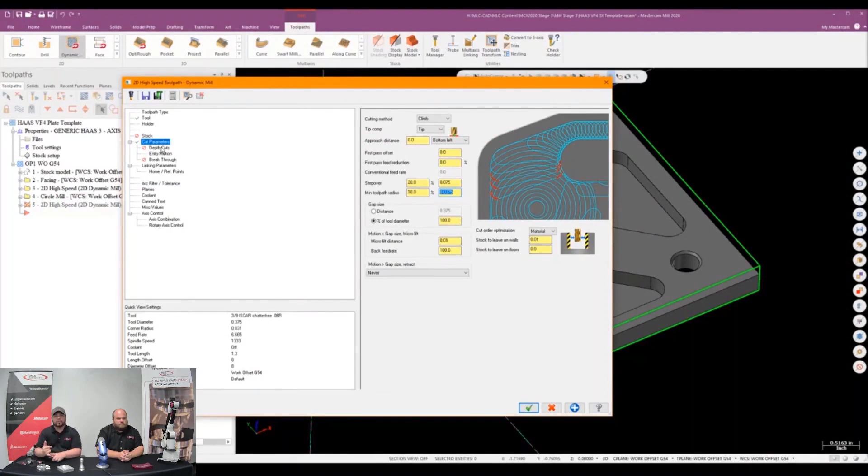Moving forward, some of you may be pretty familiar with some of these packages and add-ons that we have available for Mastercam. Depending on your experience, we're going to go ahead and start with the Mill-2D side. When I talk about the Mill-2D side, I typically think of your basic toolpaths, such as your contour toolpaths, drilling toolpaths, and any kind of tapping or reaming cycles you may encounter within Mastercam. But we also have the ability to do other operations within the 2D package, such as what we see here in the video, where we're doing a pocket operation.

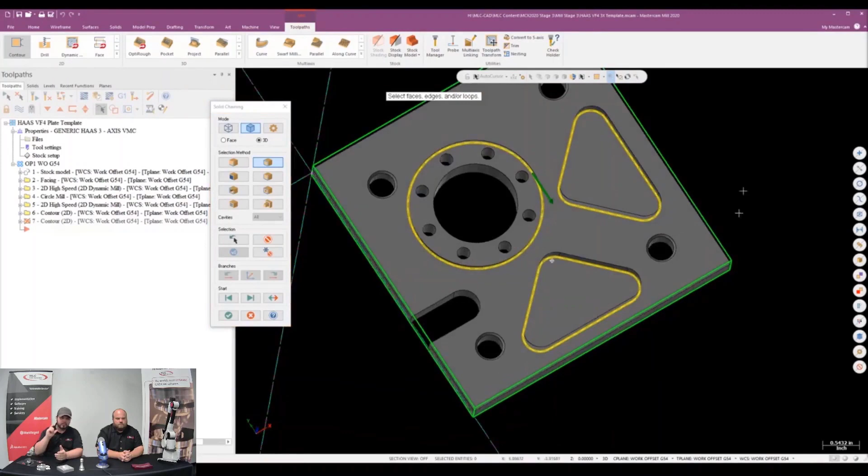As you can see from the actual toolpath itself, we're utilizing the dynamic motions that Mastercam has to offer. Within the 2D package, you'll also see your dynamic toolpath, and these type of toolpaths and motions within Mastercam will allow you to take advantage of the radial chip thinning that these toolpaths have to deliver. You'll also see more extended tool life, being that you're taking more of the blade of your end mills instead of just the tip.

We also have the opportunity to maximize the metal removal rate with these toolpaths and reduce your cycle times as well. With the radial chip thinning, you're going to see higher feed rates, whereas your typical contour toolpaths you may see standard slower feed rates like you would in the past.

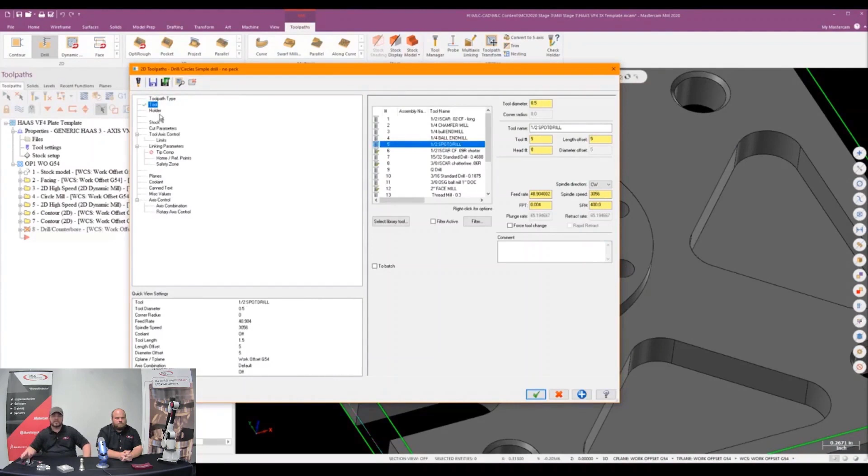As we see here, we also have our hole operations as well. We have the ability to sort our holes depending on how we select them. We can select our tools and different types of operations, and then we have a basic rundown of our linking parameters here within Mastercam, showing your clearances, your retracts, and of course your top of part and the depth that you want to drill. So a lot of these toolpaths that you'll see on the 2D side are going to be very familiar from one page to the next, even if you're going from drilling to milling.

So notice you certainly start at the top, work down the page, fill in the information, and you're going to get a good toolpath.

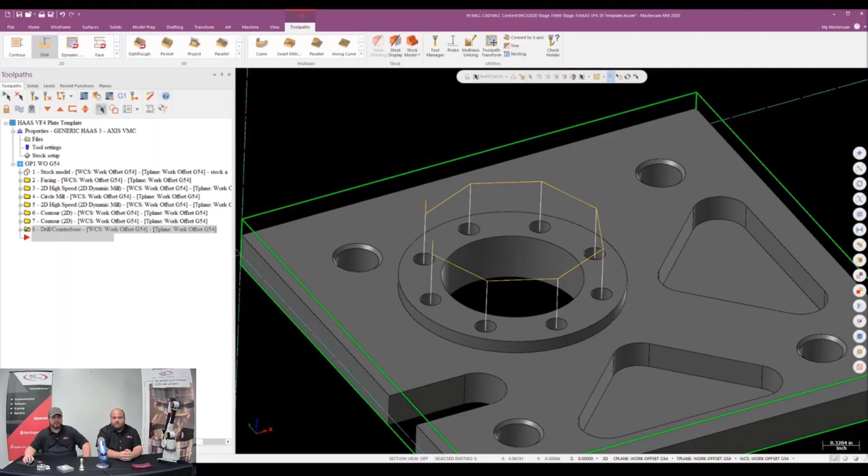Mill-2D certainly is very capable, but it comes up that some parts are just more complicated than others, obviously, and when you start getting into, say, multiple surfaces, multiple axes, and that sort of thing, or you just need a little bit more different performance, Mill-3D may be the answer. A seat of Mill-3D may be more productive and more cost-effective for you. So we'll do that next. Sherman's going to tell you a little bit more about Mill-3D and what makes it unique and advantageous.

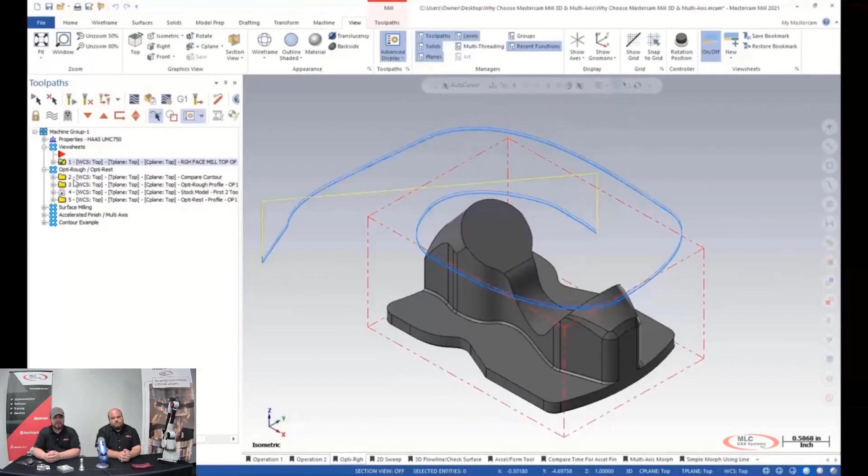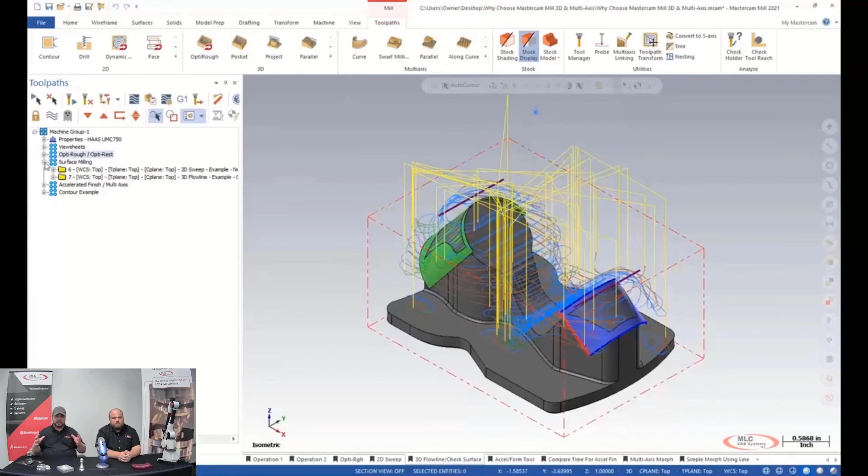Taking a look at the Mill-3D side, what you can see here is a basic contour toolpath that we have going around our part, chasing the profile of this part. The 3D side of Mastercam gives you the ability to utilize all three axes at one time. But the problem in this case is what we see with the difference between our contour and our OptiRough—I can actually take advantage of the full solid of my part.

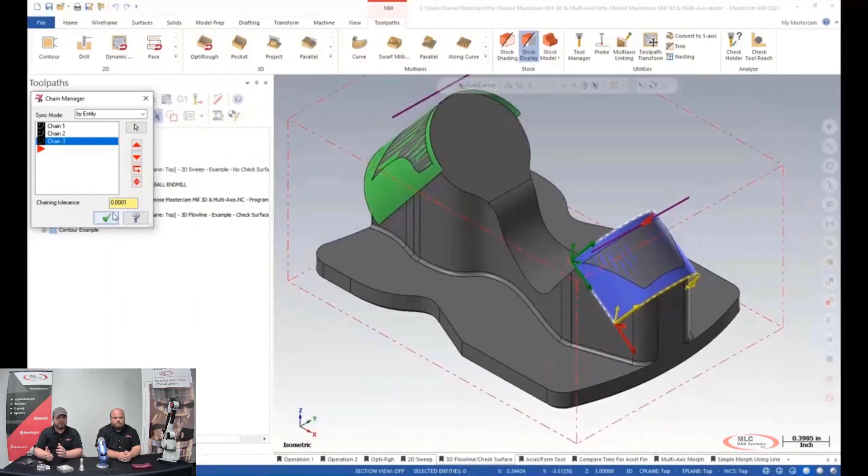Whenever we jump off into the Mill-3D side, we can utilize the solids and reduce the cycle time it takes to cut what we've seen here for the profile versus what we actually have here for the full 3D operation. The 3D mill side of Mastercam will allow you to read these complex surfaces, and again, you can still take advantage of the dynamic motions that Mastercam has to offer. In this case, we were using an OptiRough operation. Within these operations, you can also add different stock allowances to different surfaces as well.

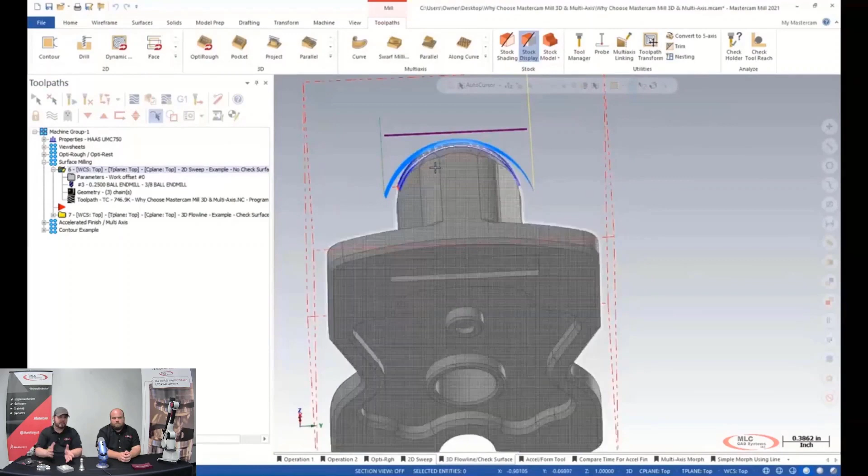So unlike the standard 2D package where you're kind of locked into what you want to leave for your stock and wall, with OptiRough, whenever you're roughing out, I can actually leave different stock on different surfaces on this part and have a little bit more control over what I want to leave for my finish operations.

So these toolpaths, you could say, it's not only easier to create the tool paths than create a finished part, but your program in the end is probably better too. Yeah, more efficient program, definitely.

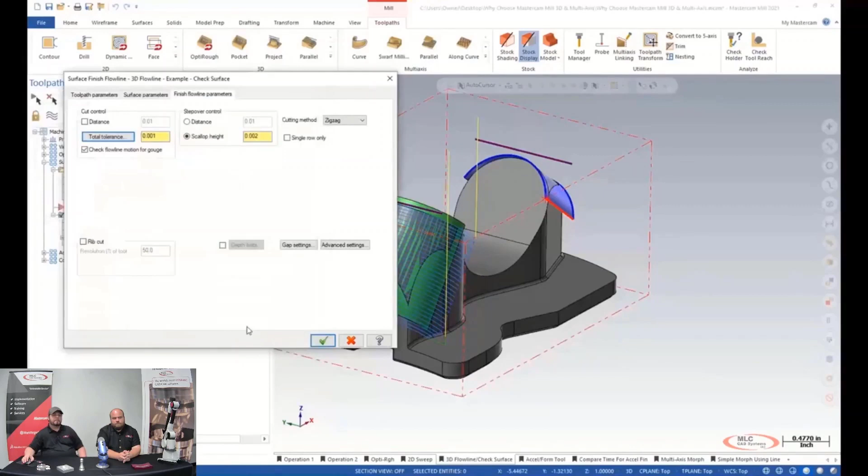More efficient programming. So in an instance like the part we're looking at here, if I wanted to rough out the center cavity, right down the center, I would have to actually create geometry to cut down. Where the profile is pretty straightforward, I can cut the profile completely around because I have just a straight wall. But now in the center, what we see on this cutout, for me to try to read that surface...

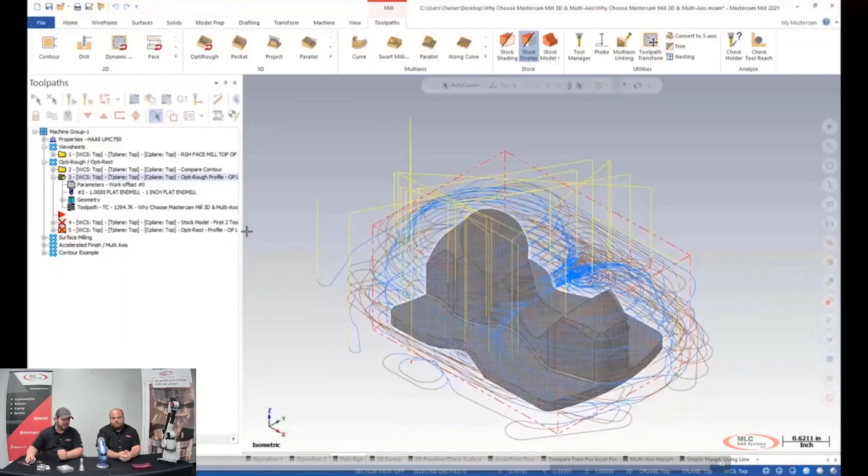OptiRough right off the bat is doing it all in one shot. It's taking advantage of the OD, the outside perimeter, and the inside as well. Where in 2D, I would actually have to have geometry laid out.

I mean, it gets a lot more complex, and those hours add up in programming. Yeah, so definitely add up.

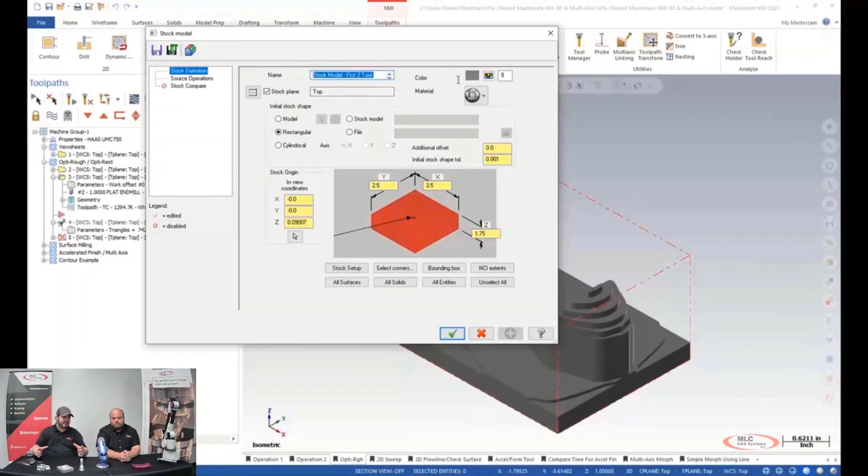And what you see here for the stock that's left behind under our stock model, within Mastercam, I can actually take larger depths and utilize that dynamic motion. And then after I'm done, actually step up and take shorter steps to get a better finish as well.

So instead of starting from the outside every single time and stepping down to get that small scallop height, we can actually take large steps and then work our way up and reduce that cycle time as well. Good deal.

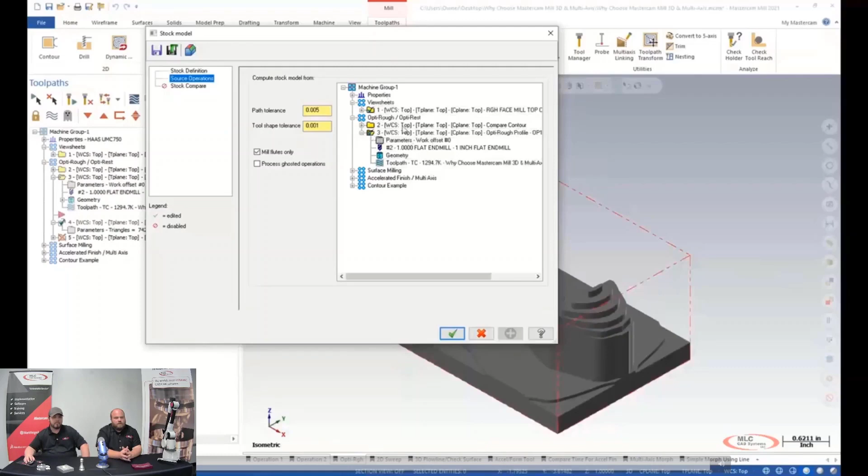But we could take advantage of the multiple surface side and read those complex surfaces, as said before. So, that looks good. And with that said, even with all that capability, sometimes there's still more, especially if you start talking about more complex shapes and the equipment too.

5-axis machines, I would say mostly. We offer a Multiaxis add-on, which would be features you add to Mill 3D. So why don't you tell us a little bit about Multiaxis and where we can take advantage of that package or that offering?

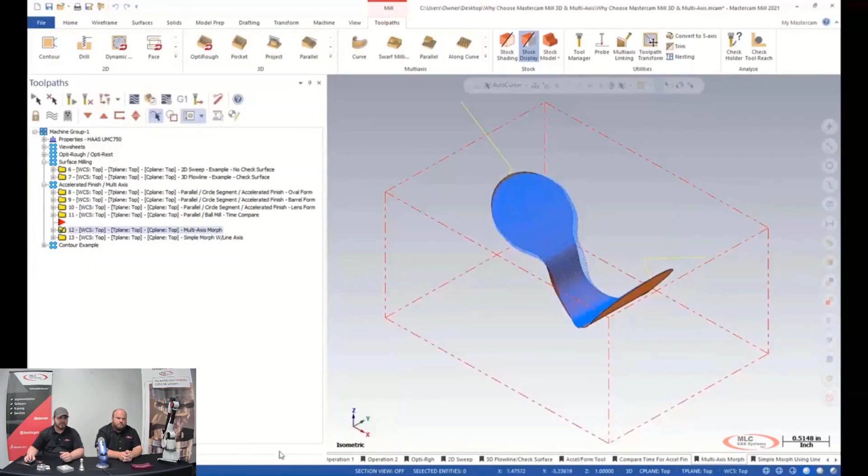Absolutely. So when it comes to the Multiaxis package, as we can see here, I have a nice surface mill toolpath. And what we're going to do for the Multiaxis, in this case, we could take advantage of the tilt axis that we're allowed inside of Mastercam.

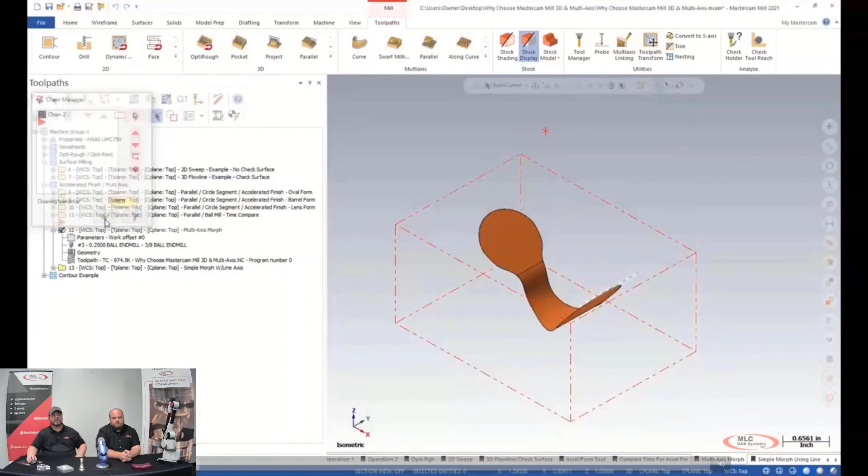When it comes to the Multiaxis side, we also have advanced gouge checking. So I can check my tool paths against certain features such as my holder or the shank of my tool. And when I run into any instances where my tool might be gouging into the material, I can tell Mastercam to either rethink the tool path or retract.

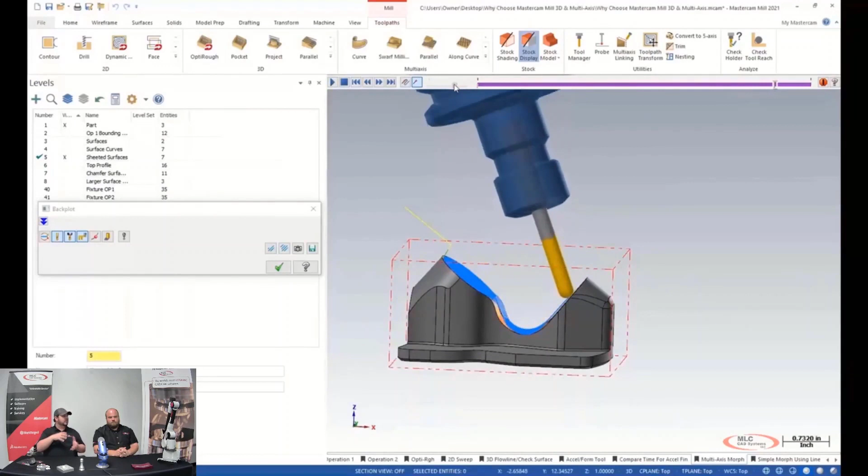So you definitely get a lot more features as far as collision checking capabilities just on the Multiaxis side. And when you say collision checking, we're talking about the cutter itself, the part, work holding? Yes, work holding as well. The machine itself? Yep. The table, the spindle?

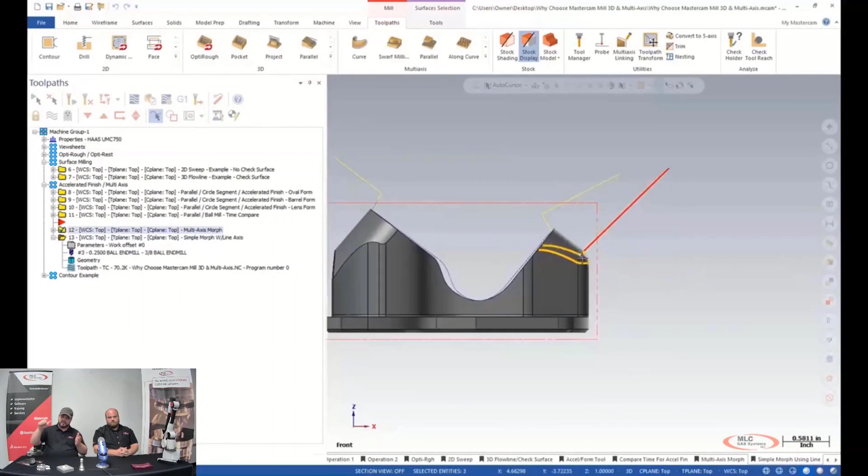Absolutely. So whenever I think about Multiaxis, I also think of machine simulation. One of the biggest things whenever you're working within Mastercam, in this case you see this part, I can actually verify or backplot my toolpath, and it's going to sweep from one side to the next just fine.

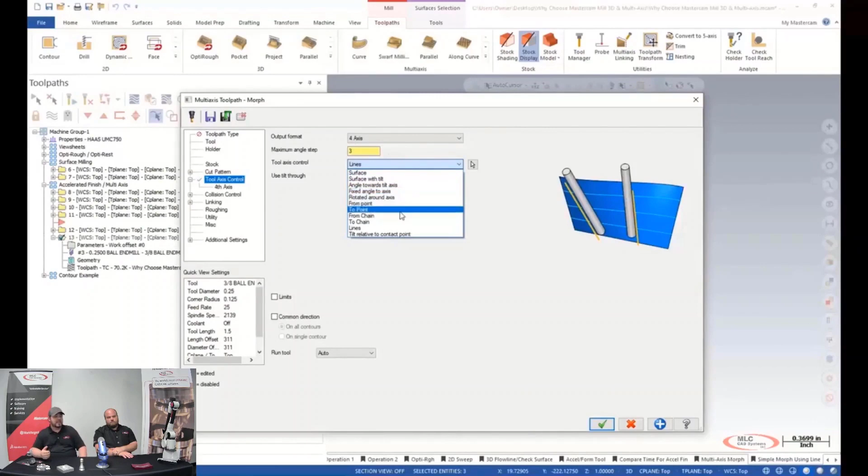What you don't see on the simulation side is when we actually get to the center of this, the table rotates. So not only are we taking advantage of those simple gouge checking capabilities, or the more advanced ones in this case, but when you compile this with the machine simulation, you get the full-blown environment, and you can actually see everything that's happening on the machine.

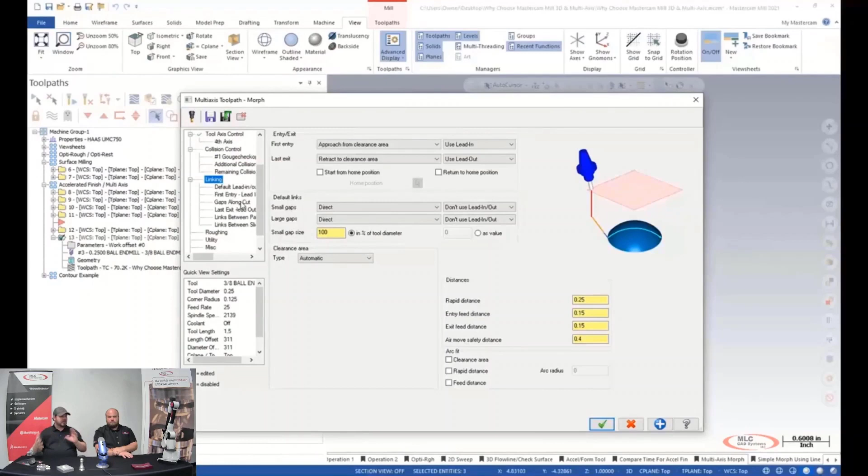But also with the multi-axis side, we start working with, say, 5-axis safety zones, where I can utilize my stock around my part, or I can create a cylinder about my part to make sure that my tool stays within the safety zone as this part's rotating around. At the end of the day, when it comes to your simple 3+2 operations, it's all about clearance, and you want to make sure that you're clearing your part.

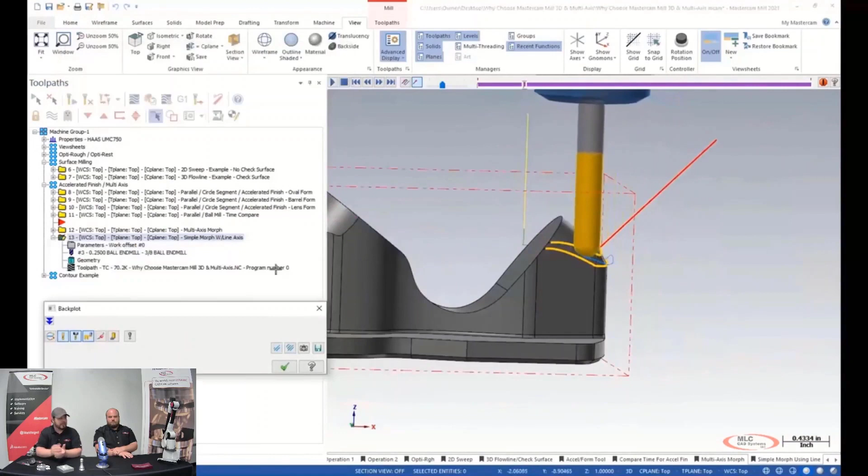When we start looking at the multi-axis side, in most cases, a lot of times people have the tendency to think, well, we're doing full 5-axis capabilities, and you do have those options. That's what this is all about.

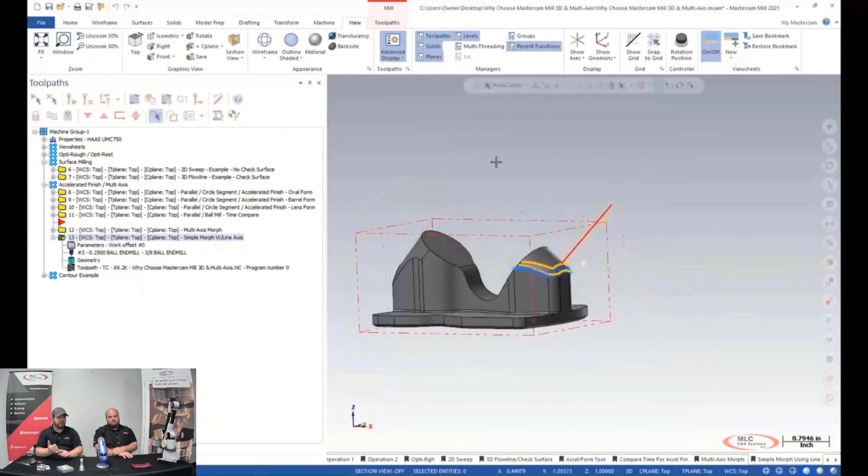But I also bring up the fact that we could take advantage of these more advanced options, advanced tool paths that we have, and make them a simple 3D or a simple 3-axis operation as well, or a 4-axis operation. So this is not machine specific. I don't need the highest end, highest tech machine. This software can help with just about any mill, really.

Correct. So if we have, say, a Haas vertical with an A-axis on the end, I can still use my morph capabilities that you'll see inside of the multi-axis operations.

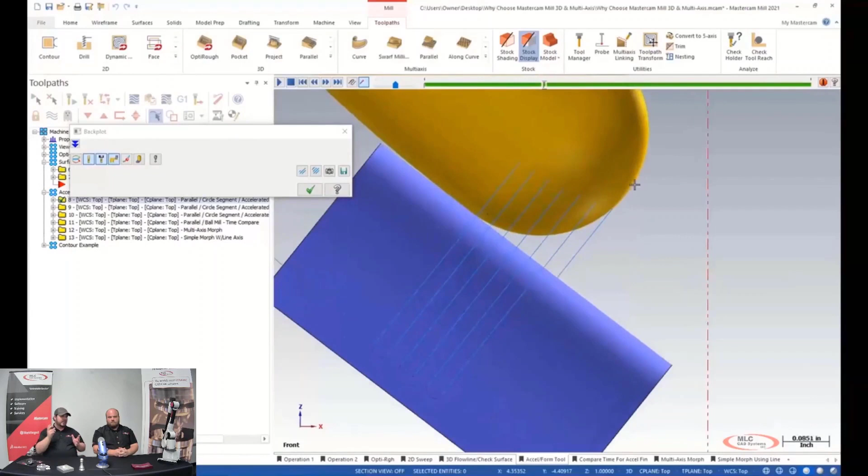And as we see here on the screen, this is one toolpath where you can see we actually have our accelerated finishing toolpaths within Mastercam as well. So typically when you look at the 3D side, we can actually use the tip of that ball mill to do a simple surface pass.

When it comes to the multi-axis side, we have these abilities such as accelerated finishing that will allow you to use form tools such as barrel mills, taper mills, any kind of lens cutters and stuff like that. And as we can see here, the finished tool path is actually going to give you a lot larger step over and still give you just as fine a finish as you would taking smaller step overs with the tip of a ball mill.

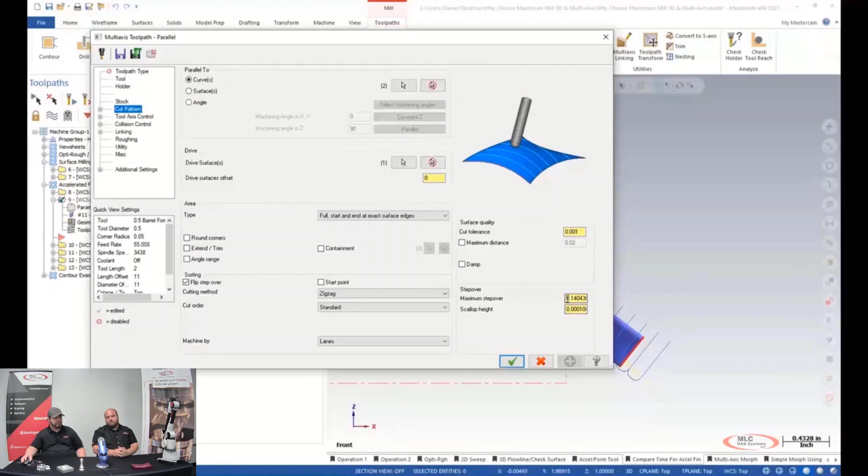So those tools you mentioned, for folks that may not be running 5-axis already, those are special, but they are available for purchase. It's not some custom tool, right? This is a tool path to take advantage of tools that exist on the market. Correct, these are typical tools that you'll find on the market all day long.

Right, so this isn't something that you have to custom draw within Mastercam. These are standard tools that you can create too. You have the options under your tooling manager to be able to simply create something like this here. We have our taper tools.

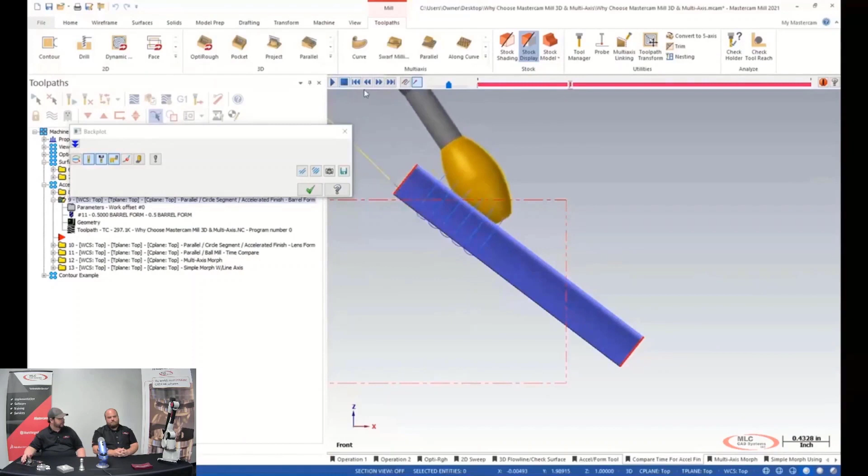Got it. All right, with that said, I think we got a decent little look at milling some of the seats and the add-on. But let's shift gears just a little bit and take a look at the lathe and what a basic seat of lathe is going to get us and what it can do.

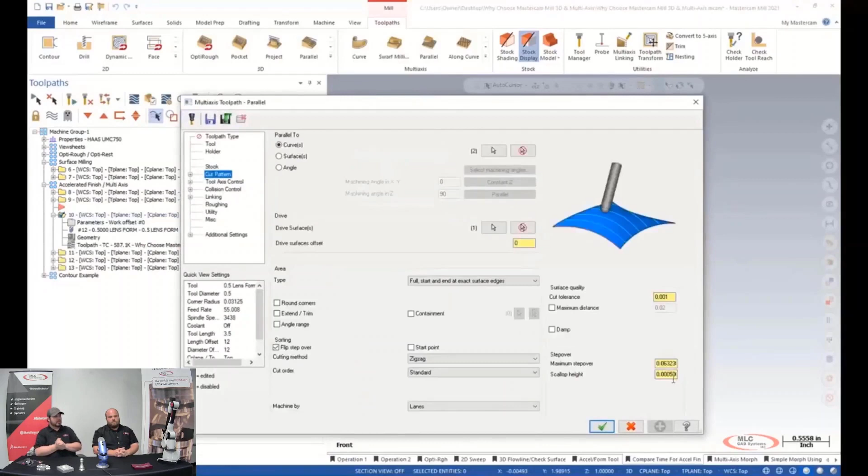Okay, and before we step forward, one thing I do want to mention as well is the multi-axis side. You can also find this not just in the 3 or 4 axis, but you can also find this for your routers as well. Oh right, so that's definitely a good point.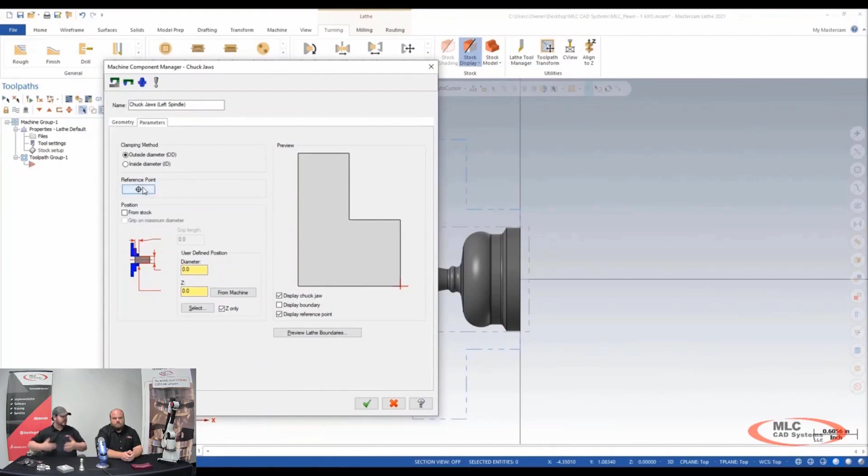But as mentioned, we're going to talk about the lathe side. And what you typically find in the lathe side, we're going to be looking at this nice little pawn here. You'll see your standard roughing operations, your grooving operations, threading, parting off, any kind of drilling or boring operations that you typically have on your standard lathe that you would run across.

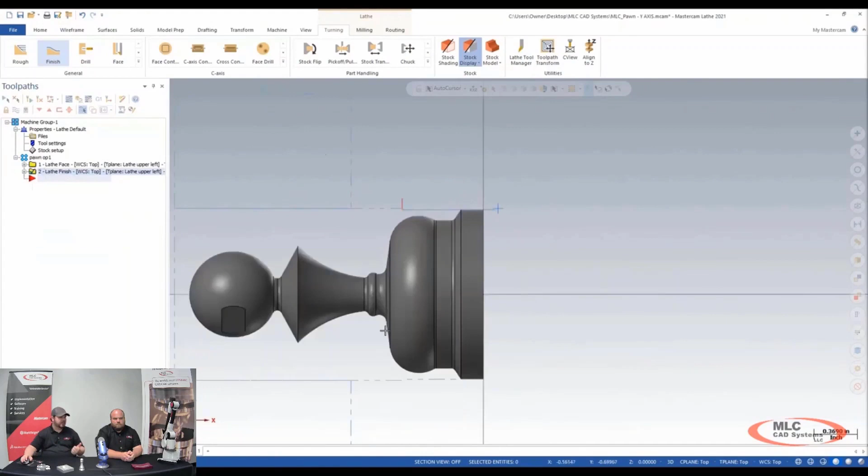One thing Mastercam does allow for is you have the options to choose between, like in this case what you see here for your setup, we can do pie jaws, we can do your standard chuck jaws, but we also have those options for long hand code and short hand code when it comes to the cycle side.

Within Mastercam, we also have certain abilities for 3D tools. If we have any custom tools that we may have modified for clearance issues, whether on purpose or not, we can actually model these tools and import those inside of Mastercam.

And we don't necessarily have to model them. We can get them from the manufacturer, right? Correct. Easy to do? Yeah, absolutely. Me personally, I like using things like the tool reps or the tooling company's actual pages. A lot of them have STL files you can bring in or step files. And this is the holder, the insert, the whole deal.

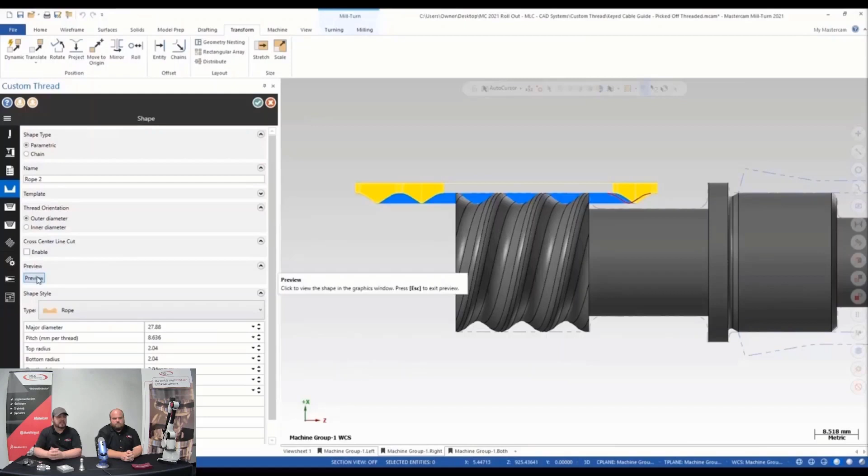Absolutely. We also have, as we see here, the ability to use custom thread cycles. Like here we have a rope style thread. We can actually use a button tool and cut these custom form threads as well and save these operations that you see here for later templates as well if you run them across multiple parts.

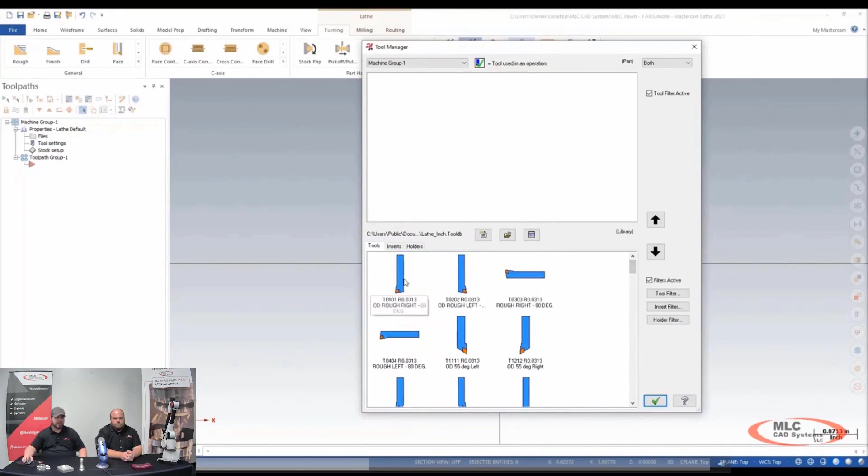So again, kind of reiterating what I said before, we have those options between long hand code, canned cycles if you prefer canned cycles on your machine. We could save these tool libraries, and at the end of the day, we want to take these tools that we see here, and as you can see, I have drills, I have my standard CNMG turning tools.

I don't have to recreate these once they're created. I can save them, and as you see here, I got my 3D tools. I can bring these back into any kind of tool or any kind of new operations that I'm doing. So it definitely saves a lot of time, and as you can see here, you get plenty of detail on those types.

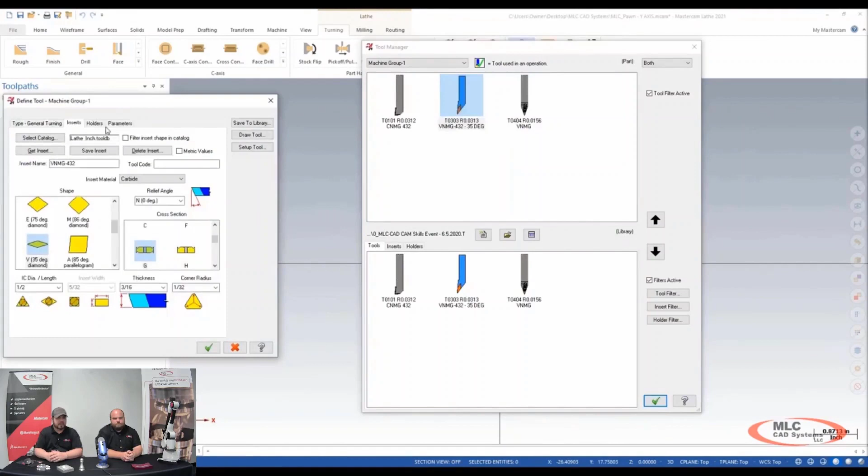So, yeah, definitely see a lot more detail. All right, good deal. Well, I think that gives you a good idea about the lathe. Of course, you can see there's quite a few tool paths there, so like with anything, if you want to know more about it, let us know. We can set up a demo and that sort of thing.

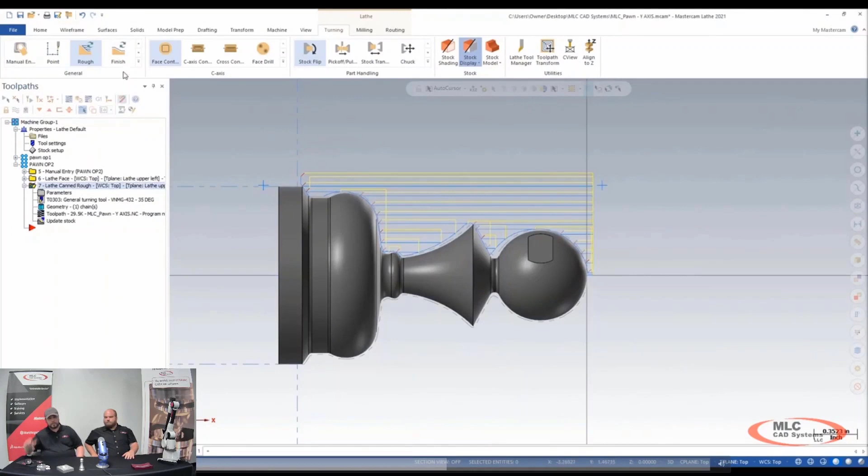But let's try to put lathe and mill together and look at the mill-turn machines and the environments and some of the features mill-turn offers. Okay, so right off the bat, whenever we're looking at the mill-turn side of things, we want to know the differences between the mill-turn and the lathe side. And one thing I didn't mention when we talked about the standard lathe is we actually have the options for C and Y axis milling too.

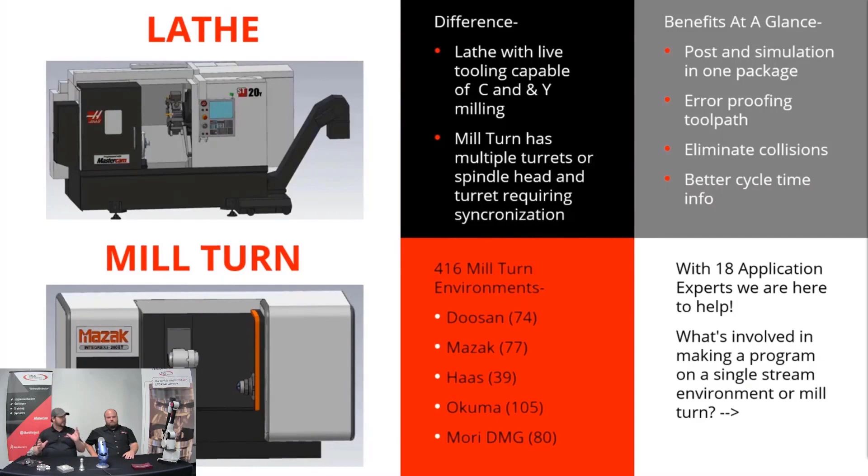Right. So as far as the mill-turn side, what this gives us the ability to do is not only have sync codes from one spindle to the next, where I can sync my spindles. Say if you're doing pinch turning between an upper and lower turret, we can actually sync these together to where one may cut at the same time as the other, or in most cases where you're leading with one tool and cutting behind it.

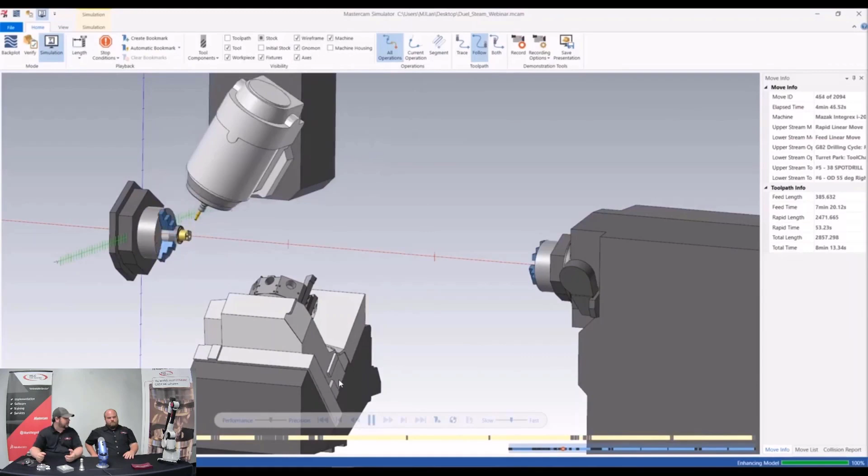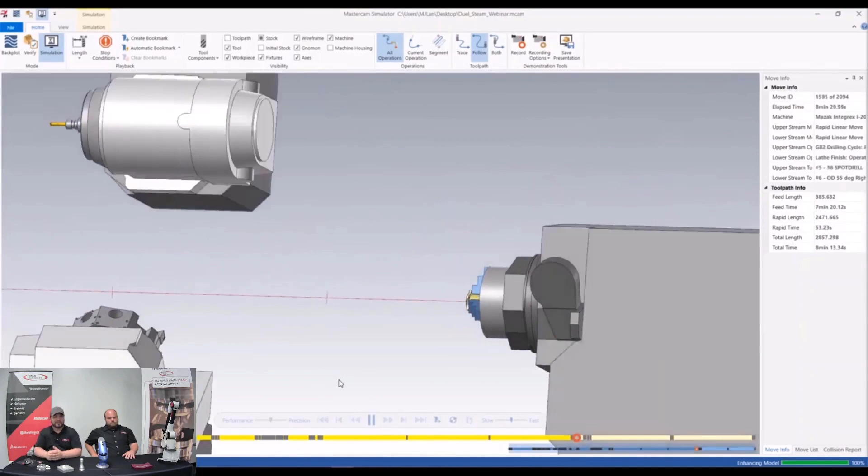But what you also see in the mill-turn environment here is we have the full machine simulation. Instead of your standard post processors that you'll see for your lathe side, we actually deliver this as a machine environment that's going to have your full machine simulation as we see here, and give you that ability to not only sync your spindles from left to right. As we see here, we have wait codes and, of course, our tool running through our chuck. But we have that ability to make one spindle and the other wait for one another, but the turrets as well.

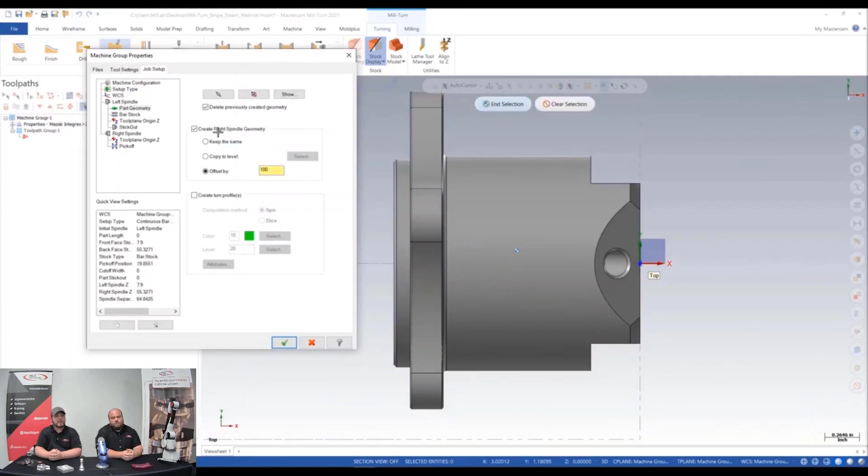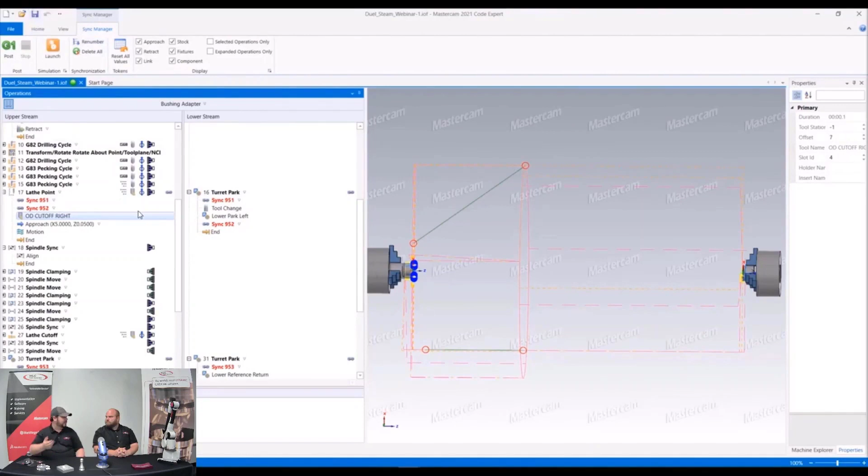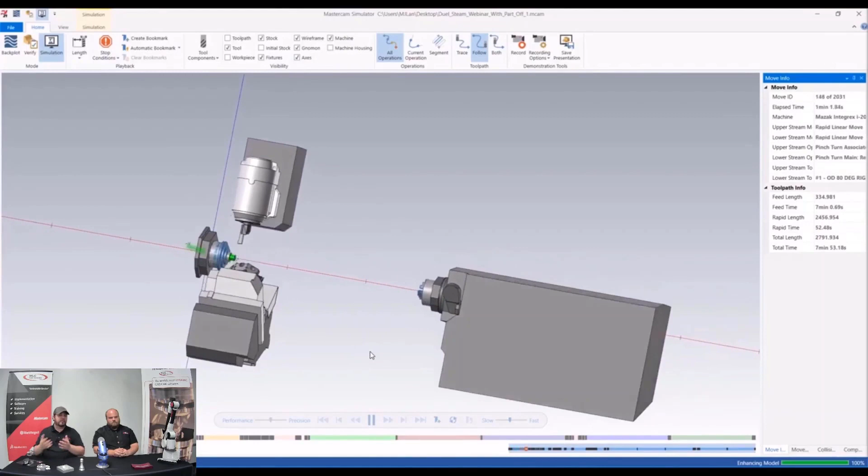It's going to allow you to see that dual sync there, in this case with the tools changing back and forth, we can actually put wait codes in there. At the end of the day, what you're going to see here is exactly what you're going to see on your machine. We have the virtual prove-out program with the wait codes that we see going on right here. We can identify any kind of collisions as well. So yeah, I see the red popping up every once in a while in the example. So that means I need to take another look, whether it's my machine hitting my chuck or my tool hitting my part, it's going to show me.

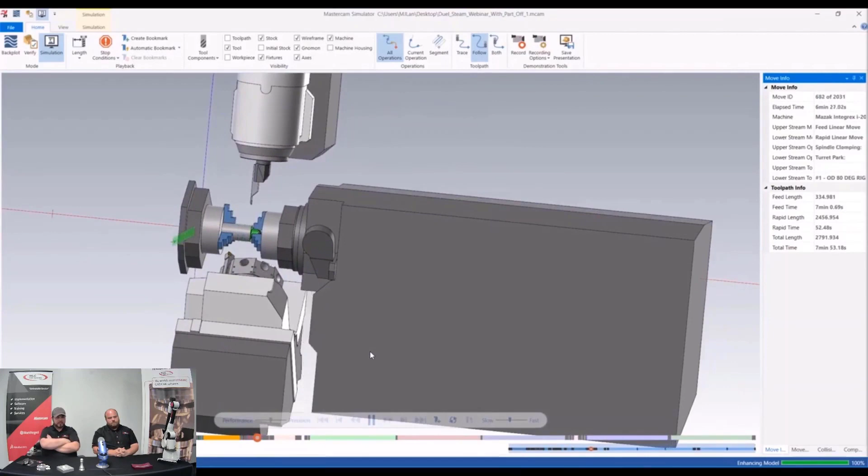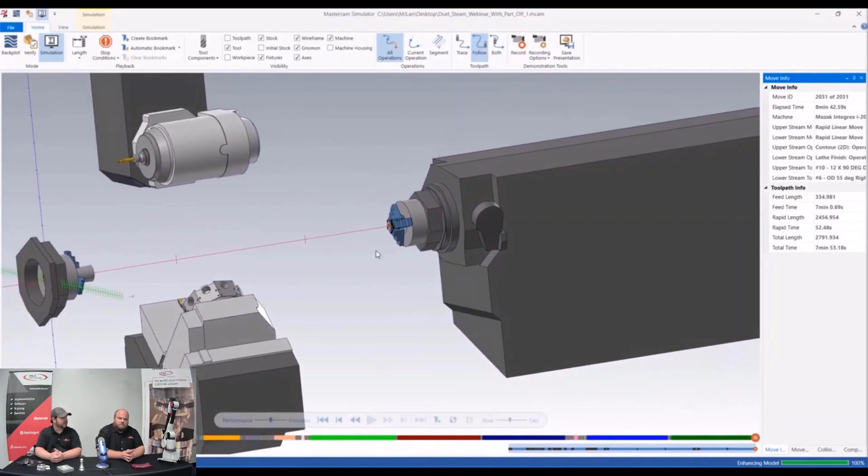Absolutely. And at the end of the day, like I tell anybody, it's always best to check twice, cut once. It's definitely a lot easier to remove the material than put it back. But the simulation here is going to make you feel a lot safer when you're actually running something. These machines are very expensive and very complex. So pretty involved, a lot going on. So the last thing you want is to have a machine down for a week or two waiting for a spindle to be replaced. Sure. So I think that gives us a pretty good idea of what's going on with mill-turn.

So we're going to switch a little bit. We're going to look at mill again, except rather than a standard mill seat like we already covered, we're going to cover something a little more special. If you're doing blades and impellers, we offer an add-on called Blade Expert that's really useful. It's a very smart tool designed to make these types of things easier, with more efficient programs, and more efficiently creating the program itself. Like we talked about before, we can make the program more efficient when we cut, but generating the program is more friendly as well. Absolutely. Tell us about Blade Expert. It's going to take these 5-axis challenges that are usually a lot of operations and streamline them into a quick template.

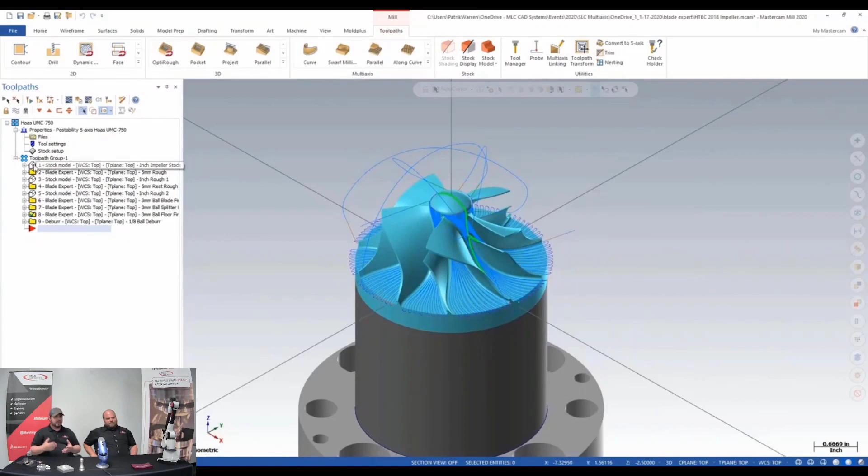So in this case, what we'll see with the Blade Expert, you'll have your maybe remove material between blades, like we see here, finishing the blades and the splitters afterwards, finishing the floor, and then finishing all the fillets and everything to kind of streamline things. But now what we see here in the operation is right off the bat, you got a nice little picture, and again, you see the roughing types that we have.

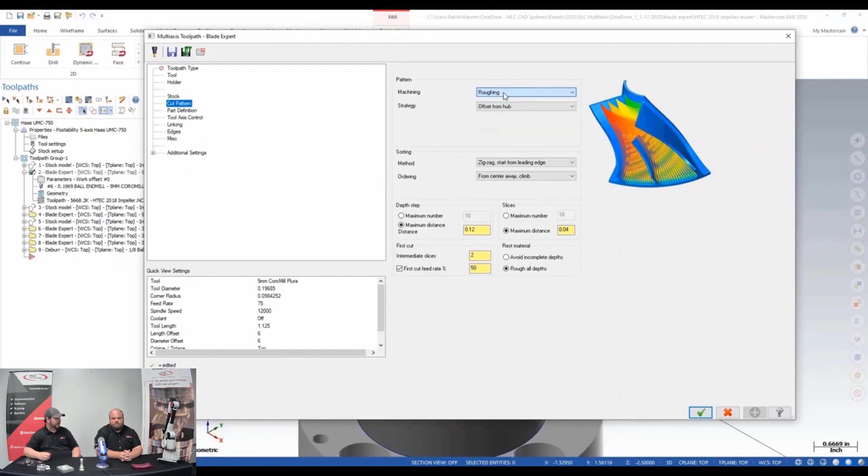But one thing you'll notice is that the interface for this is going to match the interface for a lot of the multi-axis toolpaths. Just as we talked about for the 2D milling, the multi-axis side will pretty much mirror the same thing. This makes that learning curve that you'll see between your standard multi-axis operations to the Blade Expert minute. Right. So it seems like across the ribbon and down the menu is what I need to do.

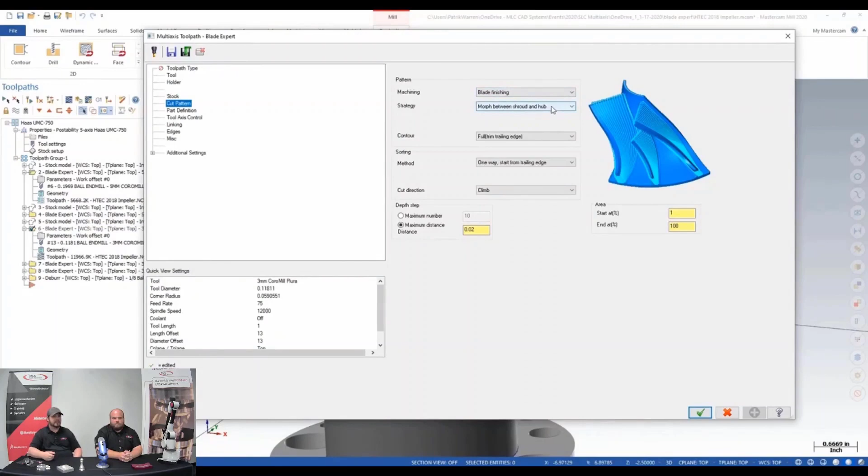Exactly. And it's going to make that deployment of, say, if you're taking the multi-axis toolpaths like morph and everything else, it's going to make the deployment of this add-on a lot easier on the user end as well. But again, what this is going to do is give you, instead of taking all those toolpaths and building a lot of geometry, this turns it into routines. And again, kind of fast paces everything for you.

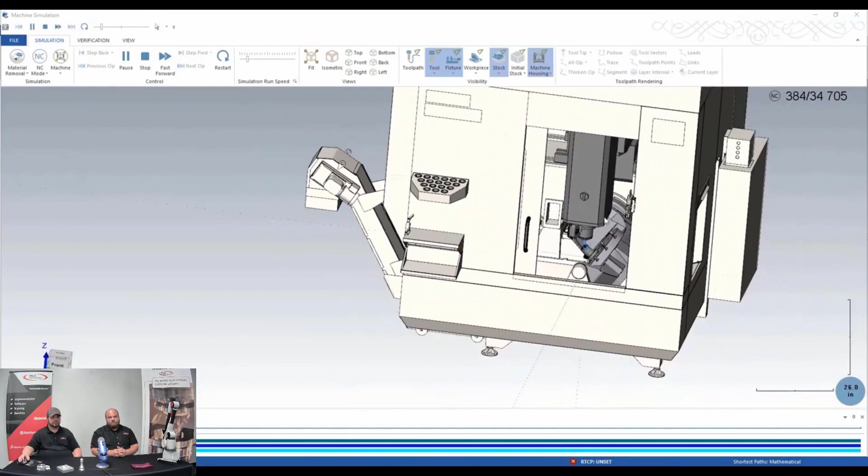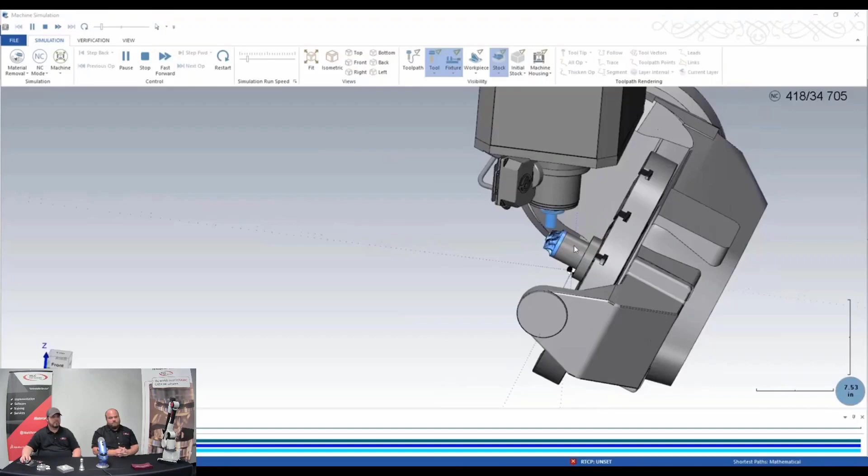And I think with that said, we're probably ready to move on to Port Expert. Absolutely. And real quick, what we see here is kind of the view for our machine simulation. So you can kind of start seeing where some of these packages really take advantage of stuff like that. And again, this is machine specific. So we can set Blade Expert to work with your exact machine environment, and everything just meshes together really well. So with that said, now we really are ready for Port Expert.

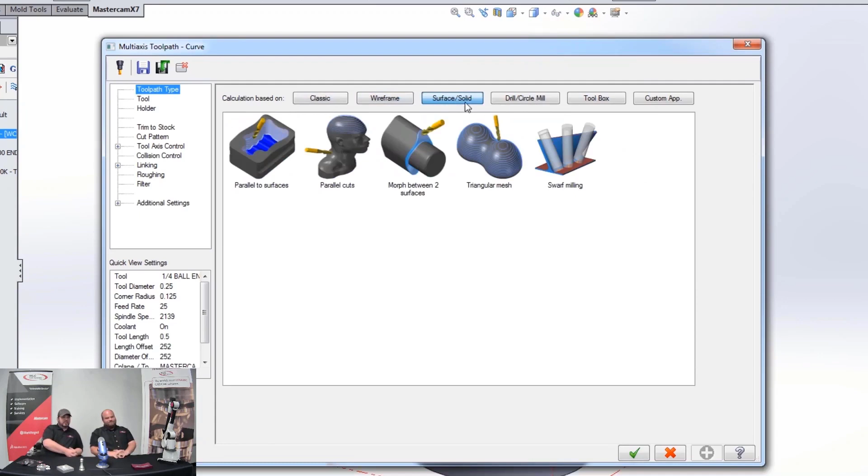And again, similar to Blade Expert, it's an add-on tool that's fairly purpose specific, but it does its job really well. So let's take a look. What we see here is the different operation types as well. The tabs that you'll find here look a little bit different, but it still kind of follows the same user interface. But again, this is another add-on that streamlines everything and makes these into more routines whenever you're doing an operation like this. A lot of things preset. There's not a lot of details that you need to go in there and tweak to make something happen. And I can import major manufacturers' tools here as well.

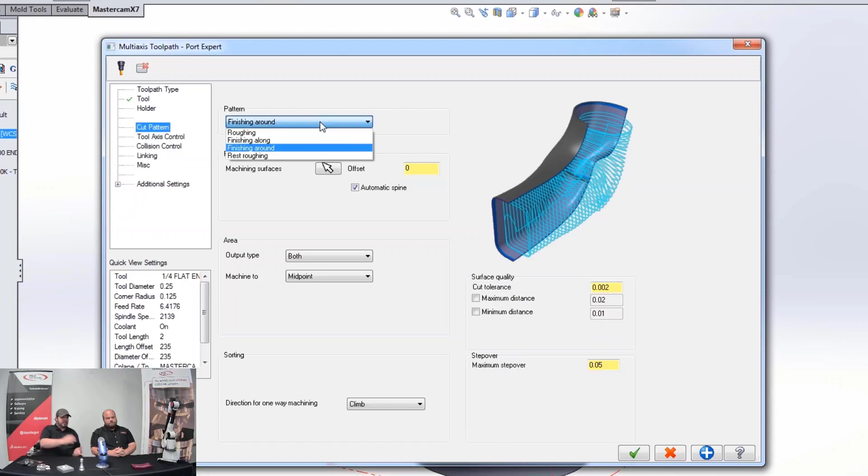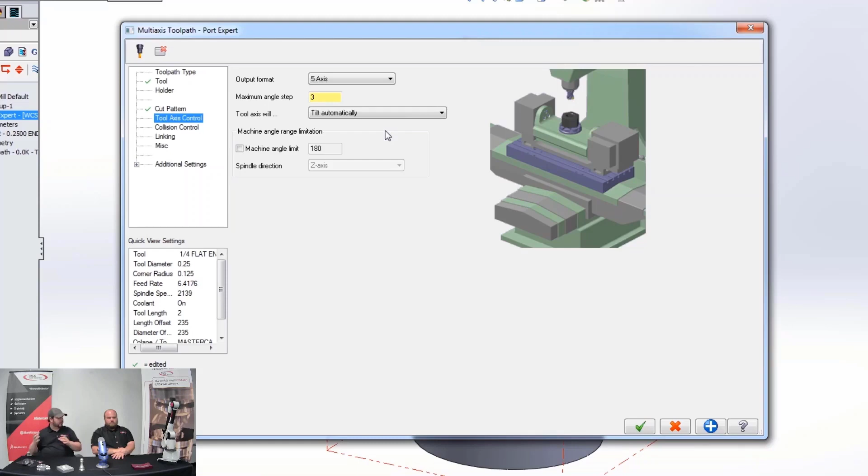Correct. Yeah, you can still take advantage of the manufacturer's tools, import them in. For something like this, you'll also see that a lot of these tools are pretty standard for what you'll find within Mastercam. And again, you can save these to libraries, use them later. But as you can see here in the video, we actually have that ability to change that output from 3, 4, and 5 axis as well. So this isn't something that's just locked into multi-axis. These are add-ons that you can use for your simple 3+2 operations as well.

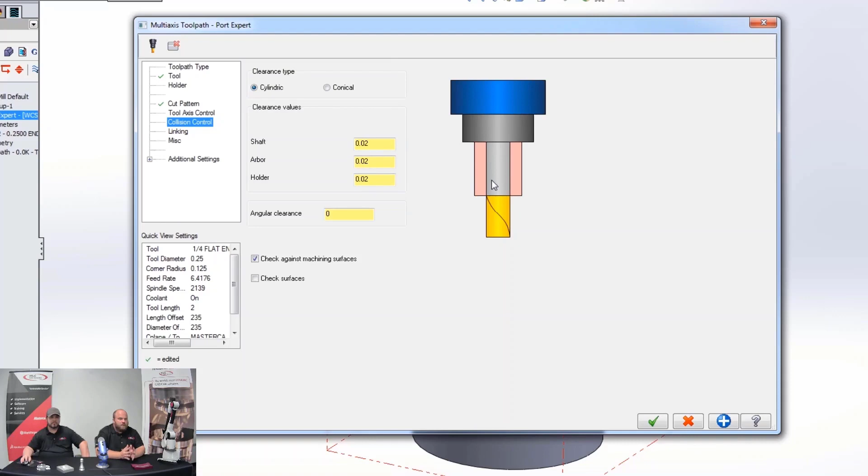And again, jumping back to what I said for the multi-axis stuff, you can use this for your 3-axis mills and 3-axis routers. All right, sounds good. It definitely has some useful tools, and we're going to shift gears again. Rather than look at more programming directly, we're going to look at checking parts, setting up parts, measuring, and even reverse engineering. So we have several options there to probe parts inside the machine, outside the machine, scan a part with something like the arm you see here, to build a model ahead of manufacturing and that sort of thing.

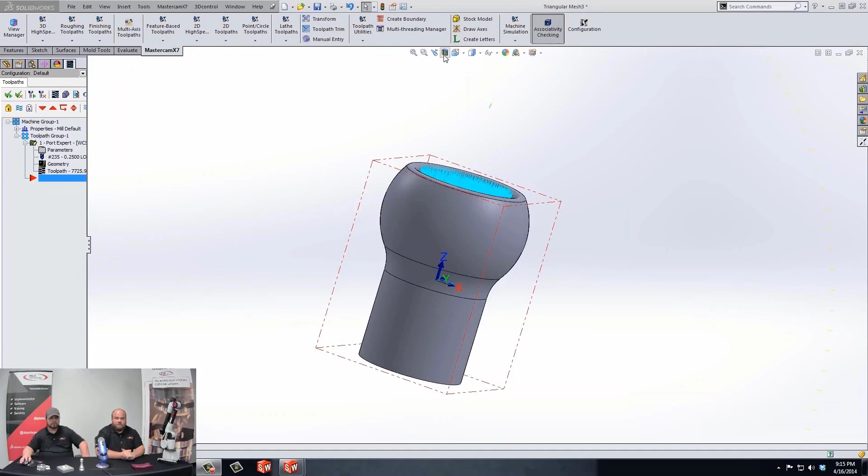So once again, Sherman, take it away. What are some add-ons we have available to help with that sort of thing? So there's going to be a few add-ons that we do have available for this. We start looking at the inspection side first. We do have the ability to probe parts within Mastercam.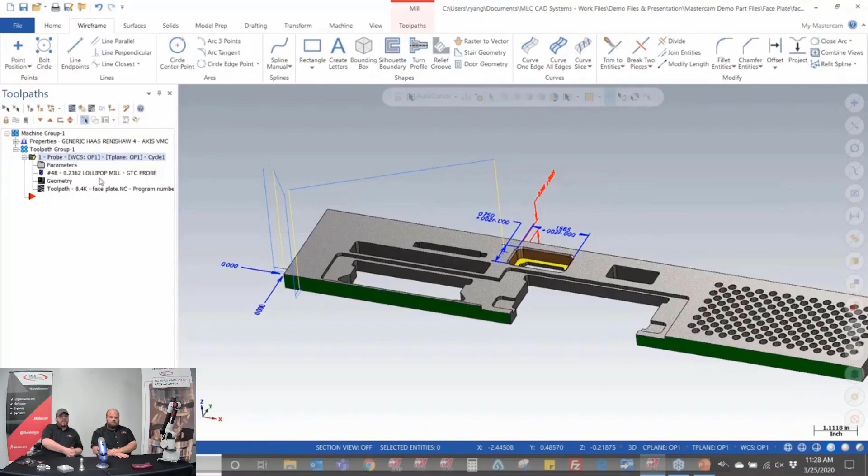As we see here, go ahead and kind of rotate this around a little bit. When it comes to the ability for probing, we can do fixture offsets. I can do tooling offsets as well. Program orientation. So if you want to actually orientate this part on your machine for your C axis or A axis, we can probe the part and actually have it rotate around the way it needs to be.

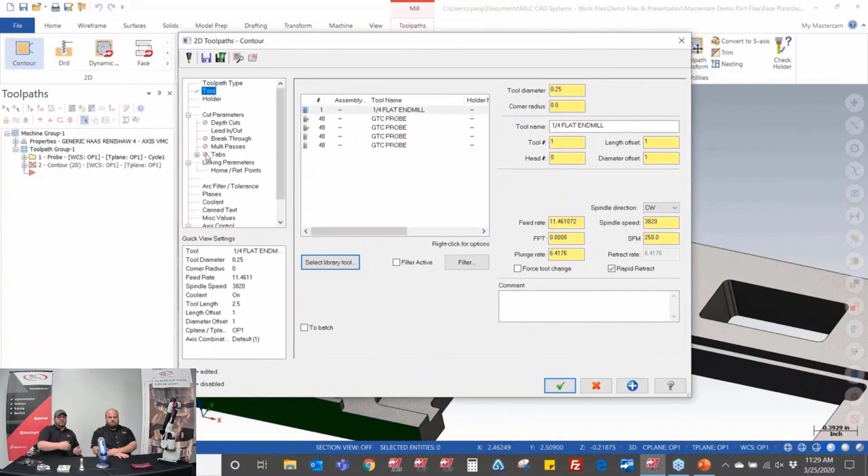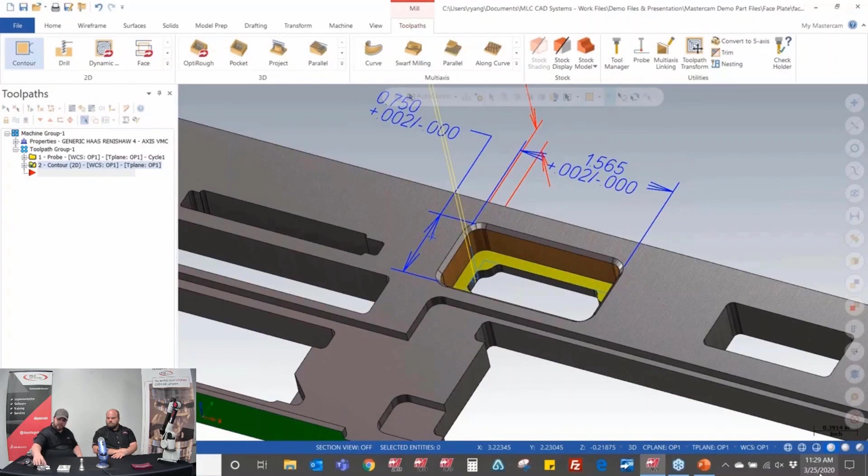But we also have the ability to do report for critical dimensions and tolerances, as well as adjust your machine. So let's say that... So quick question though. When I probe this for orientation, I probe it and then I have manual inputs, or can the machine... The machine's going to update those inputs. By itself? Correct. So in this case, let's say we're doing this bore here, and my end mill comes down, mills the bore. I can then come back in and actually probe that ID and have my machine update to whatever setting it needs to be to mill this on size.

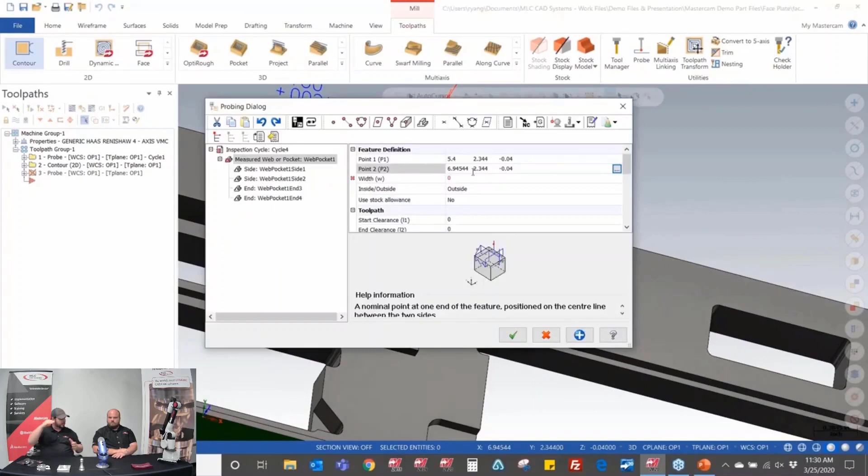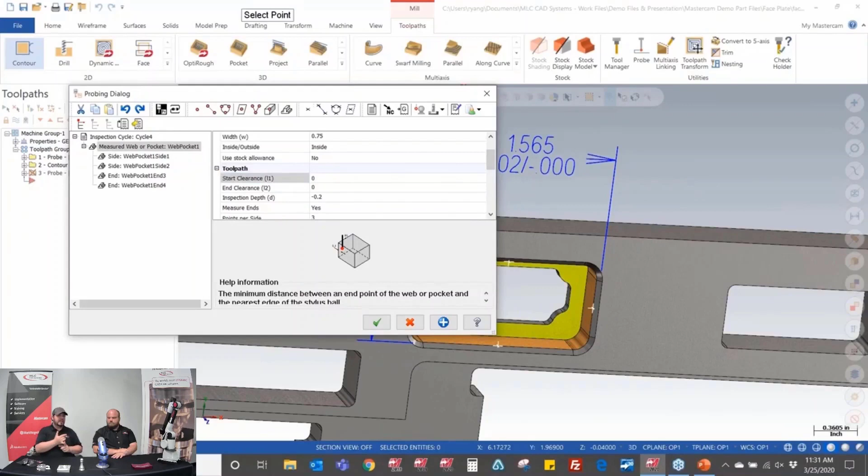So it can change your cutter compensation for diameter, amongst other features as well. You have that ability to have these updates before the program runs, mid-program, and after as well. So for setup and inspection. Correct. So this is going to help with, again, verification of those critical features within Mastercam. One good thing about the probing cycles or the probing add-ons that we do have, there are a couple of them. You can actually run these through backplot and verify as well, and actually see the probe being done.

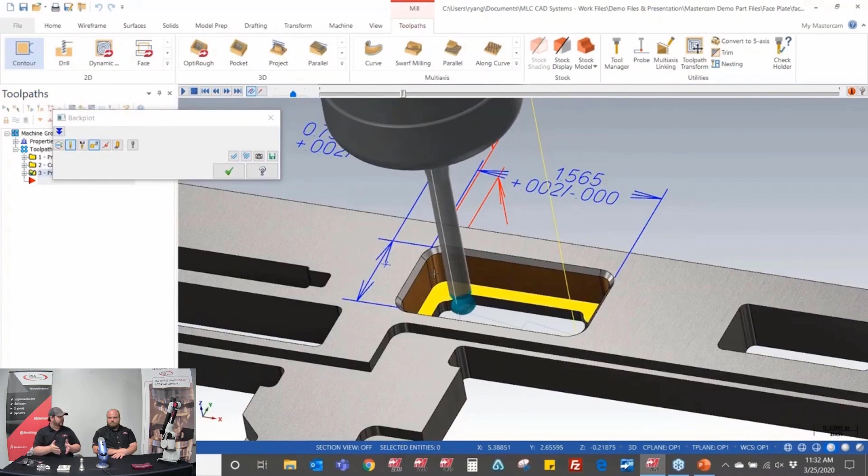So, unlike how I did it way back in the day, where we actually wrote these macros, went out to the machine, and actually verified them live, Mastercam is going to give you these abilities to see things before we actually go out to the machine. There are predefined probing cycles that, say we're using a Renishaw probe, are going to be default to that company, and machine specific as well. So you're going to have to look at certain things like your machine controls if you're using a Haas, and if you're using like a Gen 1 or Gen 2.

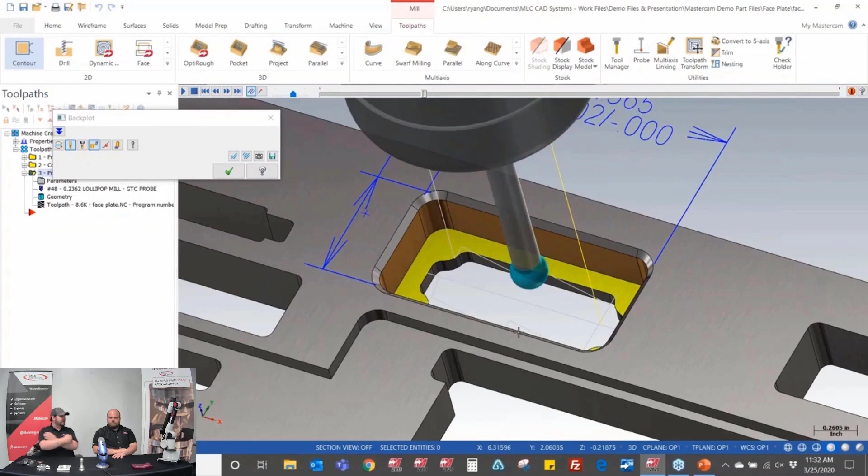But these cycles are built predefined, so they do come along with this package altogether. So it's not like you're having to go back in there and write macros and stuff yourself. All right, and as we see here, we can actually see it in the backplot, the tool coming down, actually probing that pocket.

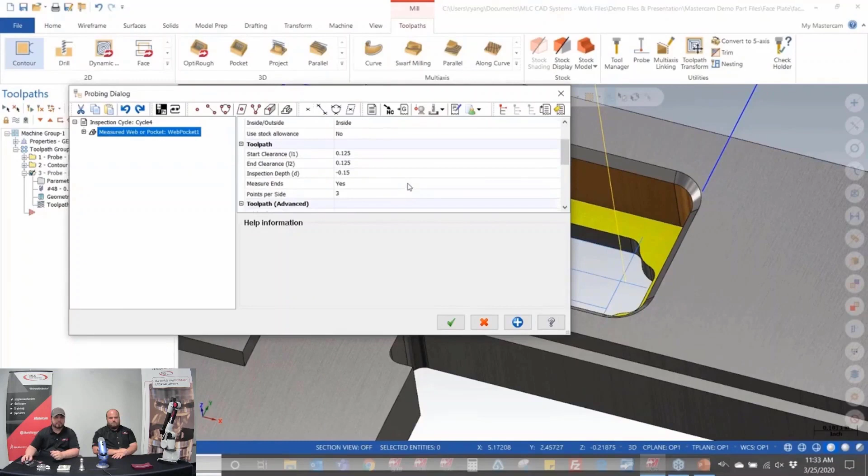Now, when it comes to the other side of things here, we do have what we see here on the table, our Master3DGage. This is the reverse engineering side of things. We can also use this for inspection capabilities. As we see here, I got my little part. Now, we can actually see the multiple surfaces as we look at this particular part file here. One thing you'll find, it's kind of like a three-step inspection process whenever I think about it. You have your part alignment, your inspect, and then you get a report, and that's just for the inspection side.

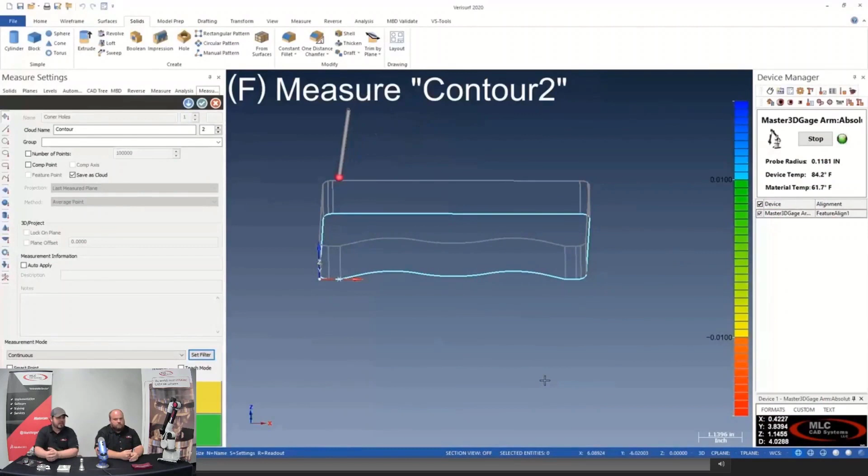When it comes to the reverse engineering side, I still think about it kind of like a three-step reverse engineering process. We'll have our measure. We can contact any kind of 2D or 3D surfaces and create an STL model off of this. What's going to happen whenever we're doing anything like this, and we can look at our video, kind of like what we see here. This is going to be our probe coming down and actually touching off the part. Yeah. You see the probe in this example. We'll be talking about the 3D scanner too. You'd replace this touch probe with, I guess, a light or laser type scanner if you want to do it touchless. Correct.

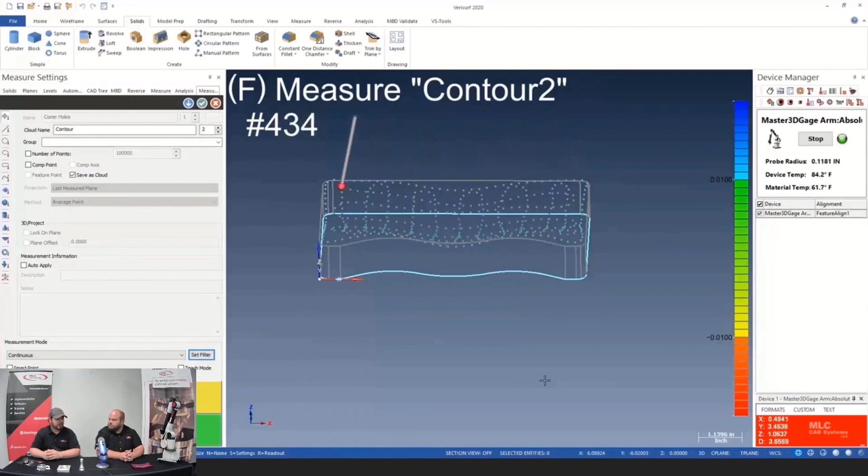So the part that we actually have on the screen here is the one that we have on the table. And as we probe over this part surface here, you can see these cloud points that are being created. And these cloud points can later be turned into any kind of surfaces or solid models in order to reverse engineer a full part that you need. And again, this can be an STL or it can be a 3D model as well afterwards. So what we see here is we're actually taking these points and we're going to create a surface based off of these points and split our model in order to get the same model we have here on the table.

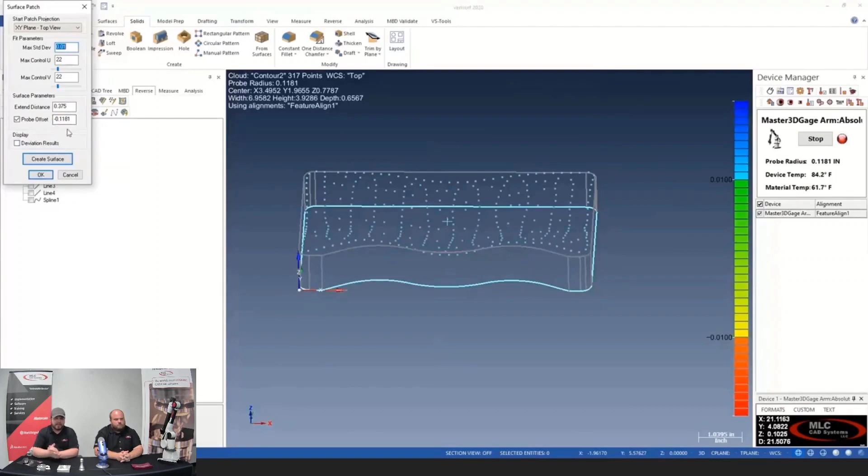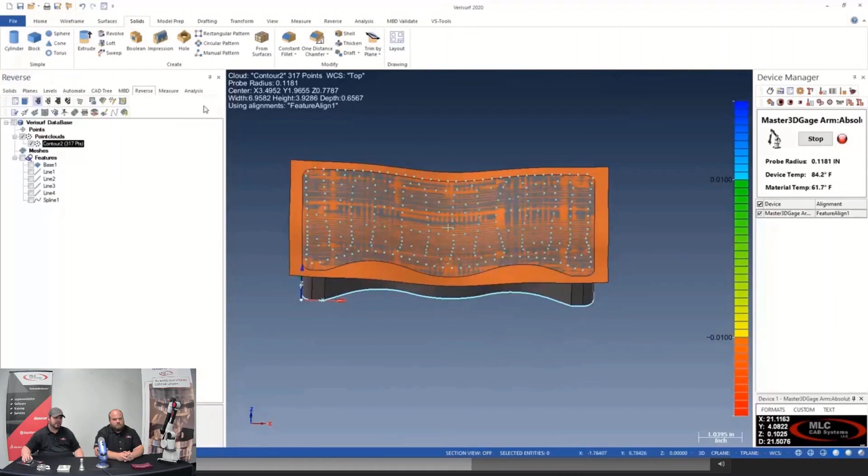As Adam mentioned, we do have the ability to get rid of the probe here and actually have a 3D scanner attached to this, making it a little bit easier to actually scan something like this instead of probe along. But yeah, it's pretty cool. I definitely like what you see here. You see that surface? Now you can make one of these. Yeah.